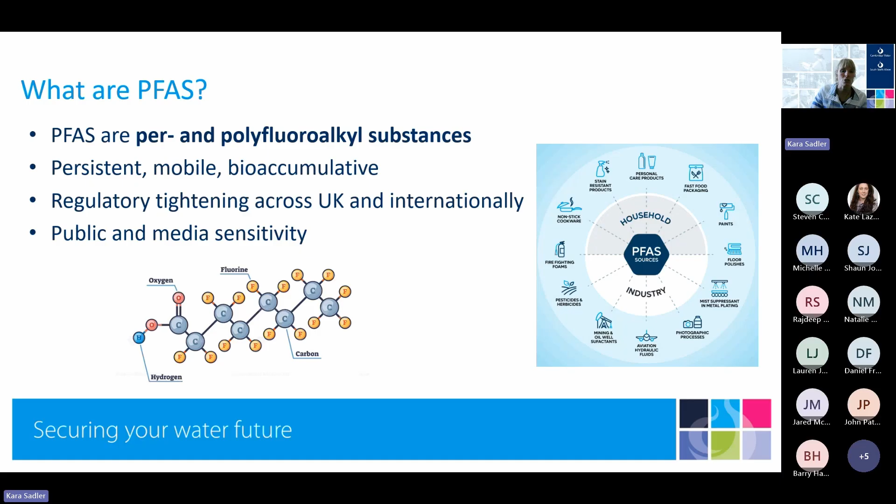Now, the Drinking Water Inspectorate, the DWI, has provided a lot of guidance in terms of PFAS, and in March last year they gave a consolidated guidance document detailing their requirements for PFAS monitoring, how we need to risk assess that, and what our strategy is in relation to our public water supply systems. The World Health Organization has also produced guidance documents—there's a lot of information out there.

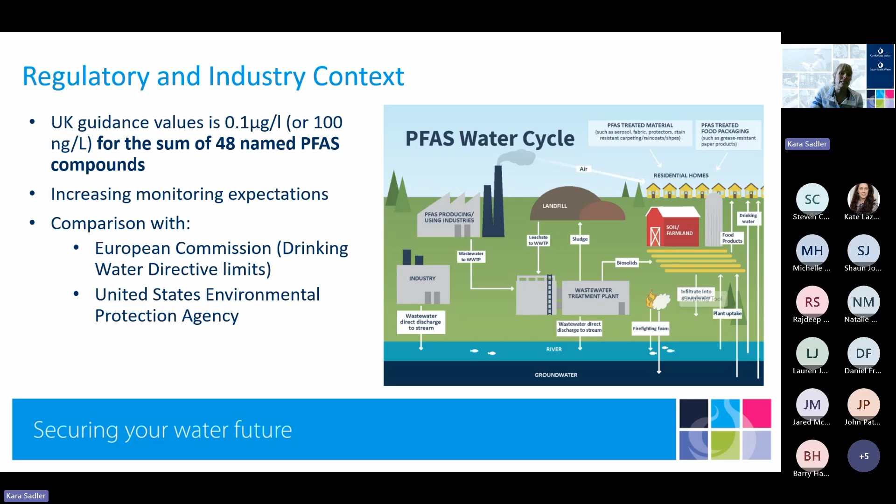Essentially, there's still no limit that's been set, but water companies have a duty to ensure that water is wholesome. So although there is no statutory standard for PFAS in drinking water within England and Wales, nor is there a World Health Organization guideline value, the DWI has taken a precautionary approach and produced tiered guideline values for water companies to adhere to—that is 0.1 micrograms per litre, or 100 nanograms per litre, for the sum of 48 named PFAS compounds. There are lots of PFAS compounds out there, but in particular it's those 48 that our regulator is interested in understanding where we have that within the drinking water.

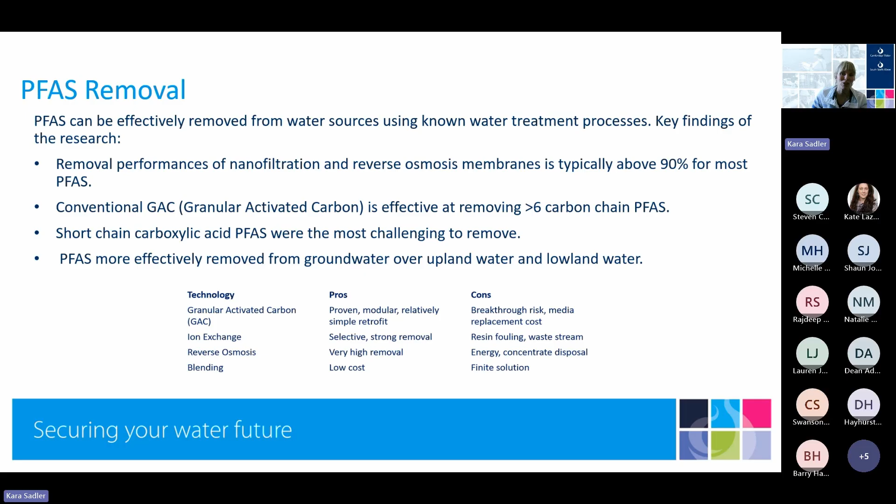However, it does depend on what you're trying to remove and to what level. There is some really good technology out there, and possibly in terms of best available technology—where does that apply? GAC usually has, up to this point, sat at the top because it's known, it's a simple retrofit, and it's a proven technology. However, there are some drawbacks to using GAC, which I will share in the next few slides.

So to give some context into the background of the case study: we have a water treatment works within Cambridgeshire. It treats water from groundwater at Duxford, which is an active airfield and museum in Cambridgeshire. So the key part being their active airfield.

From the few slides ago, you'll see that one of the causes of PFAS can be from where we've had detection of PFAS in firefighting foams previously. Although we've worked with the Duxford airfield to remove those fluorine compounds within their firefighting foams, there is still that accumulation within the ground that means we have to treat it, and it doesn't go away.

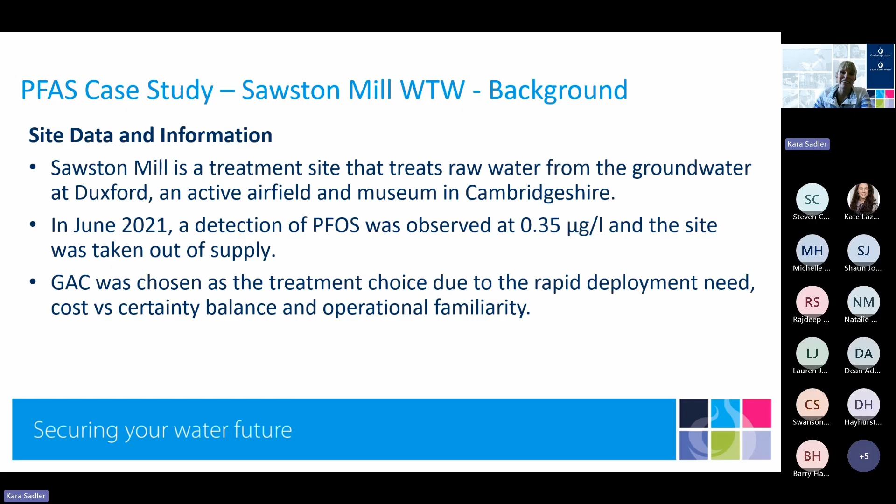Back in June 2021, we detected PFOS at 0.35 micrograms per litre, which was above the tier 1 level that we need to see in drinking water, and the site was taken out of supply. So GAC was chosen because of the rapid deployment, the cost versus certainty balance, and the operational familiarity, which is a really big part of that.

In terms of the site, it was designed to treat on an empty bed contact time of 15 minutes, an average flow rate of 176 metre cube per hour, with 3 GAC vessels. The idea was that we would get about 30,000 bed volumes at that flow, which would give us about 12 months of running before we had to fully replace those GACs.

To note here, the groundwater quality at Sawston Mill from Duxford is very good, so we didn't have to include a backwash facility, because of the challenges of backwashing that water. We were unable to discharge and run to waste in the environment, because you've got PFAS in your backwash water, it's going to be going straight back into there.

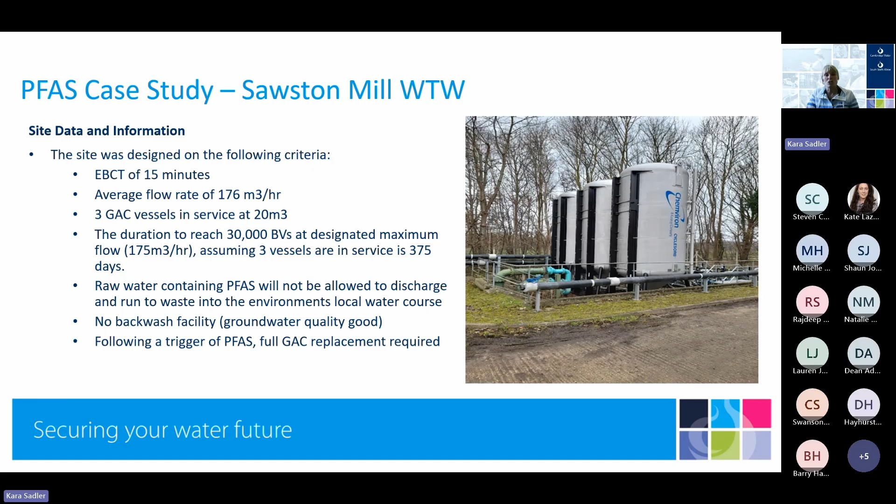Following a trigger of PFAS, full GAC replacement would be required. In terms of our response criteria that we set ourselves internally, we had 3 levels that we would go through before we shut the site down, carried out further investigations, and then actually carried out GAC replacement. Now these are quite tight and stringent levels - if you look at the original level that the DWI have, it's at 0.1 micrograms per litre, so ours is a quarter of that guidance level.

The reason being is the turnaround time of the lab samples - generally speaking it could be 2 to 4 weeks before we got those results back. We did put Sawston Mill on a quick turnaround time, but we don't have the 24 hours to respond, and we cannot have water that, if it was above that level, going into supply for more than 2 weeks. So we had to set ourselves some very conservative levels.

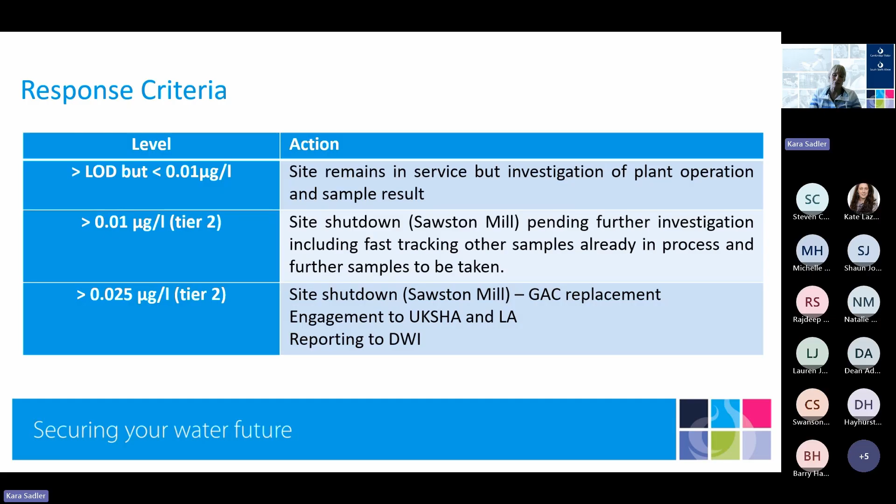But the performance was not as expected. One of the key things that we did as part of Sawston Mill was have a pilot plant, and that pilot plant was to operate to enable us to see breakthrough from PFAS compounds before we had it on the final water or from the GAC vessels themselves.

The site went into supply just at the end of April, and we had detections within July. We didn't have any on the final water, but we did get those detections a lot earlier than we expected.

We had to replace the GAC media, and one of the other things we encountered that we didn't account for within our design parameters was that one of the key PFAS compounds, PFBA, was higher on the post-GAC level than the raw water. So there was a suggestion that there may be some desorption of that, because the GAC had a greater affinity for other PFAS compounds.

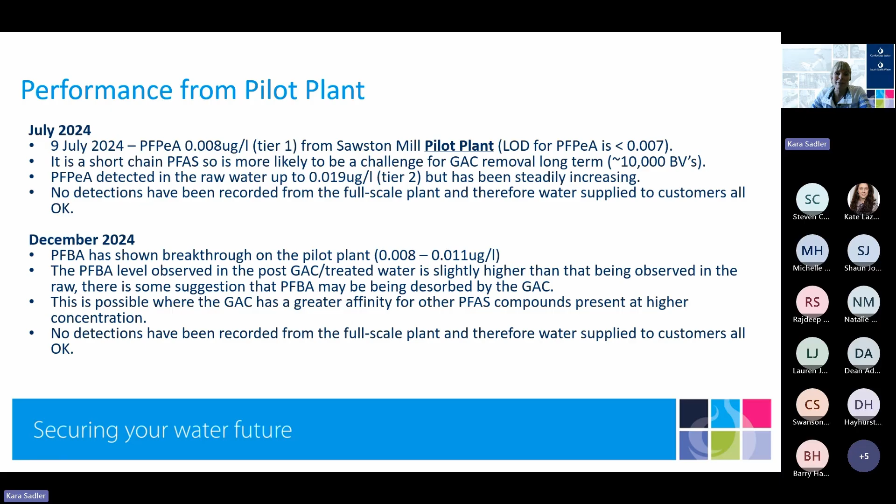Those two types of PFAS compounds I'm talking about are the short chain molecules that are a lot harder to remove by GAC. So GAC is a great technology for removing those longer chain molecules, but when it comes to the shorter chain, there is a real challenge for removal using GAC.

So our expected use of the GAC plant, we were expecting at least 12 months, and we found that we were getting around 3 months. This is because, as I mentioned, the short chain compounds PFPeA, PFBA and PFHxA showed the signs of breakthrough. Going back to what I said earlier in terms of the efficacy of the treatment process, it really is dependent on what you've got in your raw water, because having those present created a challenge we were not expecting to have as a shorter version.

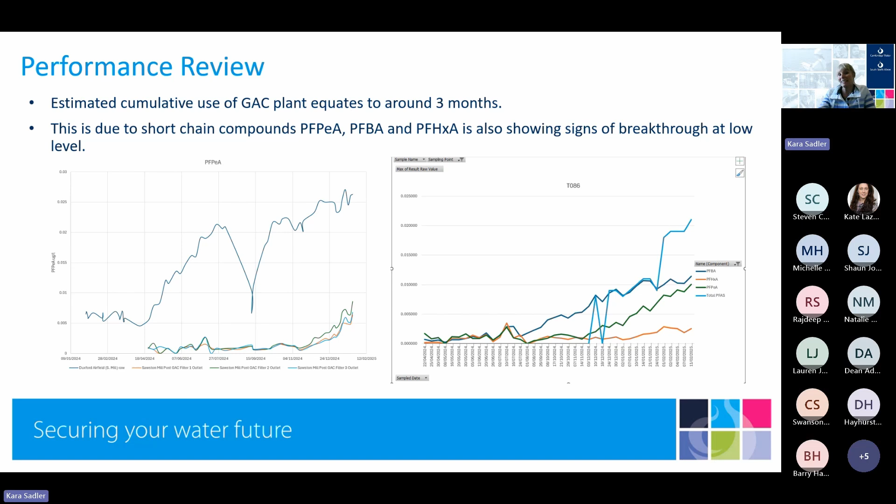And just to say about the operational costs, we're talking about £150,000 every time we need to replace those GAC vessels. So it is a big operational cost that wasn't accounted for, when we think that we could go 12 months from that.

So where are we now with Sawston Mill? Final water breakthrough occurs on our short chain compounds. When the total PFAS exceeds our internal limit, the site is removed from supply and we have to replace the GAC, which is happening roughly every 3 months.

The GAC pilot plant is absolutely key for predicting breakthrough. As I said earlier, the sampling frequency and lab turnarounds limit how conservative you need to be on the trigger levels, because if it was a 24-hour turnaround time, we would be able to be a lot more lenient, but we cannot risk having water that's going above those guidance values to our customers.

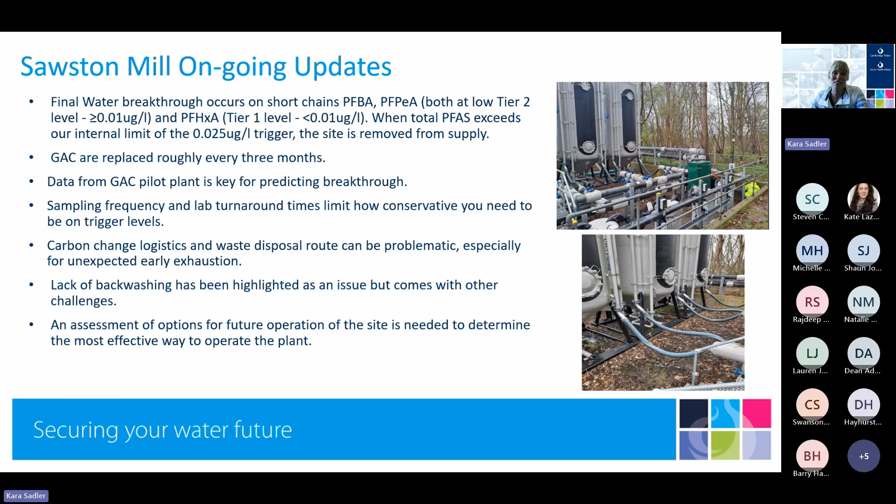Carbon change logistics and the disposal route can be problematic, especially when we've got early exhaustion, and the lack of backwashing has been highlighted as an issue, but it comes with other challenges by retrofitting that into the process. So we are continuing to look at an assessment of options for the future operation of the site to determine the most effective way to operate the plant.

So is it a long-term solution? And is there another technology that is becoming preferable? Well, in terms of the 3 months compared to our 12 months, the media replacement frequency from a cost and carbon point of view is problematic, especially with disposal costs, embedded carbon, the extra haulage, etc. For ESG, it is not great practice for us, especially when we're looking at net zero strategy and resilience planning. The whole life cost really does need to be taken into account versus capital cost.

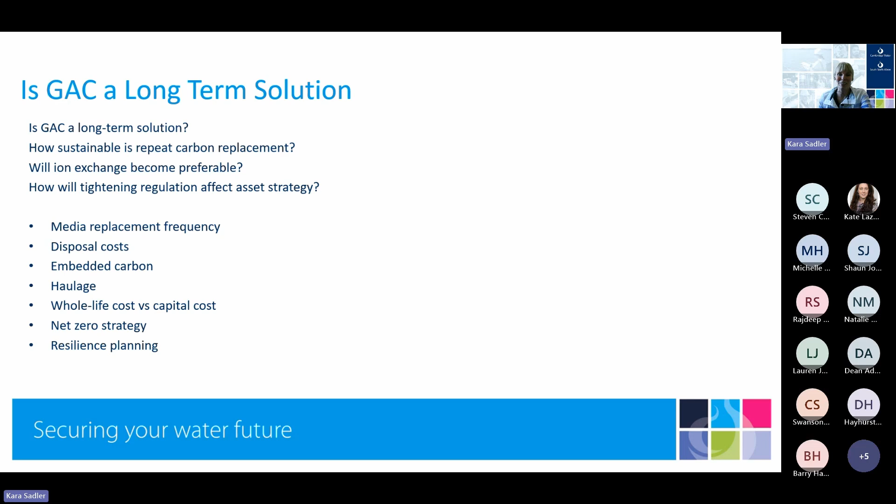We don't have the answer yet. We are still ongoing with this, and we are looking at other technologies on what we can do, which I think will feed nicely into hearing from David and Cathy now in our next presentation.

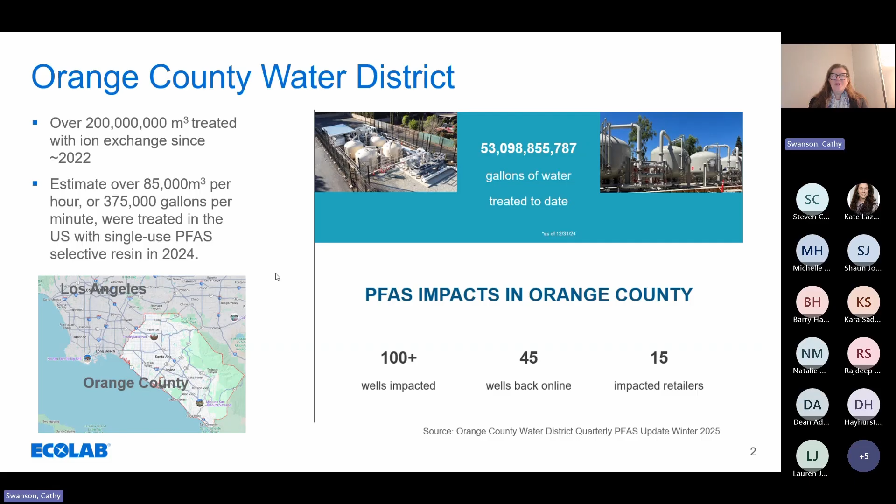And I thought, wow, that's really cool, because I think 80% of all sites treating PFAS in California are treating with ion exchange. And so I sat down and tried to estimate how much of our water in the US is treated with ion exchange when looking at PFAS. And I estimated over 85,000 cubic meters per hour are treated with single-use resin in 2024. And that's probably grown in 2025, and I should probably update the slide, but it's still a pretty big number.

And why is that? Why has the US embraced single-use ion exchange technology? Now, I want to clarify, when I say single-use, it means that you use it and dispose of it, so there is no waste stream with a single use. A couple of reasons: fast kinetics means smaller footprint, which means lower capital cost. High selectivity means longer bed life, which means lower operating cost. And because you're using less media for longer periods of time, you have less waste generation, which leads to better sustainability and lower operating cost.

So what I hope David and I are going to show you today is a little bit of data to substantiate everything I've got on this slide.

So in the UK, how prevalent is ion exchange? Well, it's actually used extensively in the municipal space, specifically for nitrate removal, and also there's an installed plant removing chromate at a municipal scale. Outside of municipal water, it's a standard technology used in all nuclear applications. It's in all breweries, it's in pharmaceutical applications. Anywhere where you've got a process stream that needs treatment, with an ionic constituent that you want to remove, then ion exchange will be present.

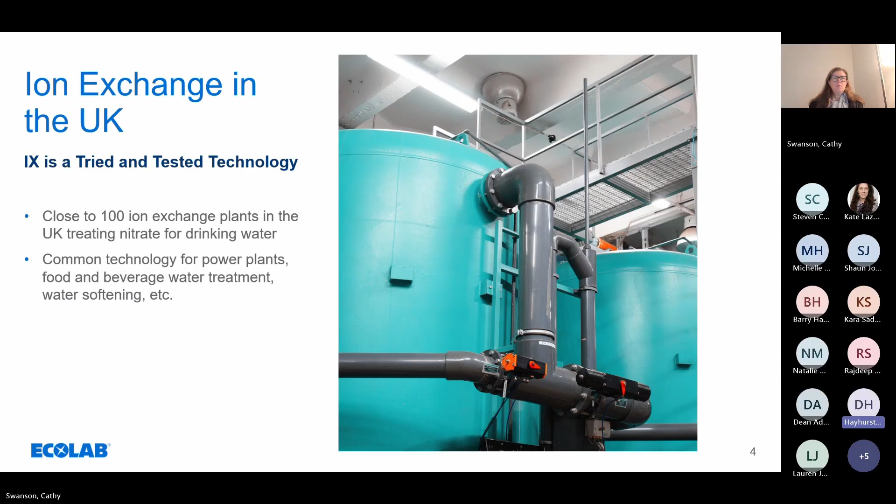Today we're going to talk about PFAS applications. We'll cover what PFAS is in some reasonably high level detail, go into the regulatory stuff in the US, Europe and the UK, do some ion exchange, not too heavy on the chemistry, then get into system design, and finish with a case study of a plant design and install in the US.

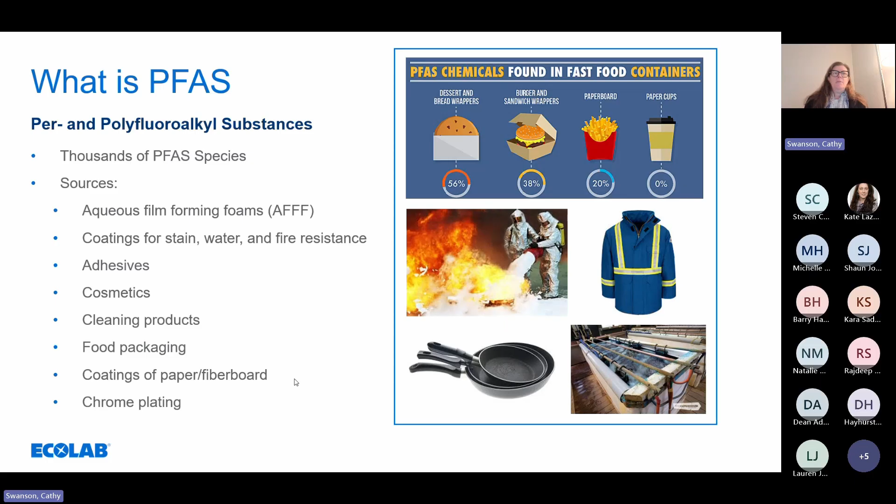This was covered already, so I don't want to go too deep into it. Just know that there are thousands of species and many sources. We're not looking at treating all of them at this point, but why do we care? It's because PFAS is bioaccumulative, environmentally persistent, and linked to a variety of healthcare concerns.

Barry did a very nice job covering that in the beginning, so we're going to skip over it. In the United States, this is a map from the Environmental Working Group that looks at where PFAS detections have been found. There are some states treating this more aggressively than others, and we do have different regulations at the state level.

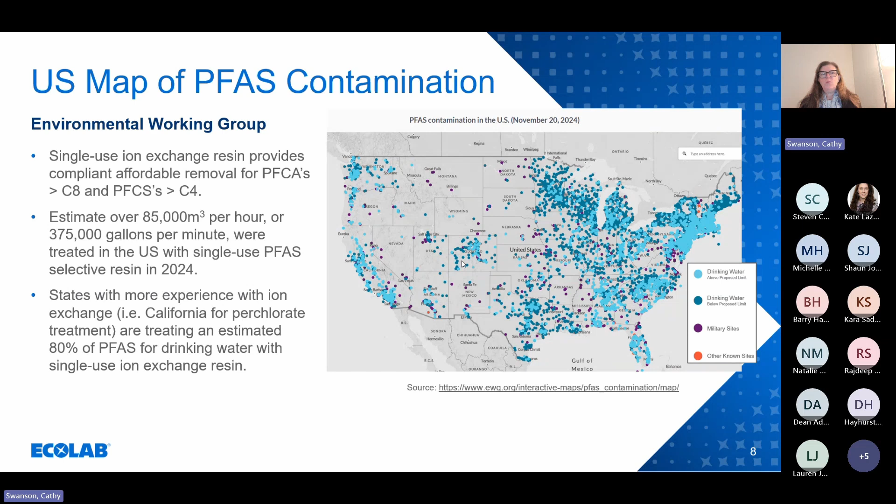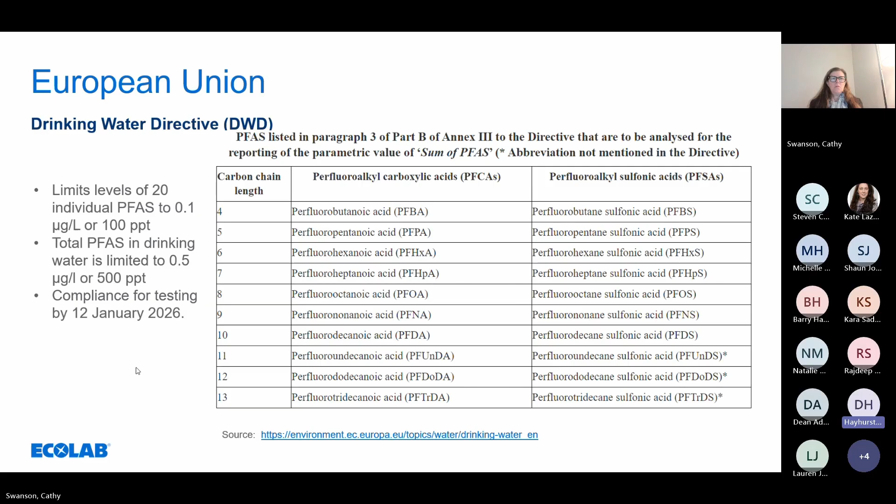In terms of these, you can actually group these molecules into two different types, as illustrated here. Depending on the functionality of the molecule and the chain length, this affects how the molecule will load onto your media, as Kara alluded to earlier. Anything with a sulfonic acid group will load nicely onto an ion exchange resin and stay fairly firmly bound. Anything with a long chain, above C8, octanoic acid, PFOA, will load quite strongly. Anything with a carboxyl group and a shorter chain, so the butyl, pentyl, hexyl and heptyl species, are more challenging.

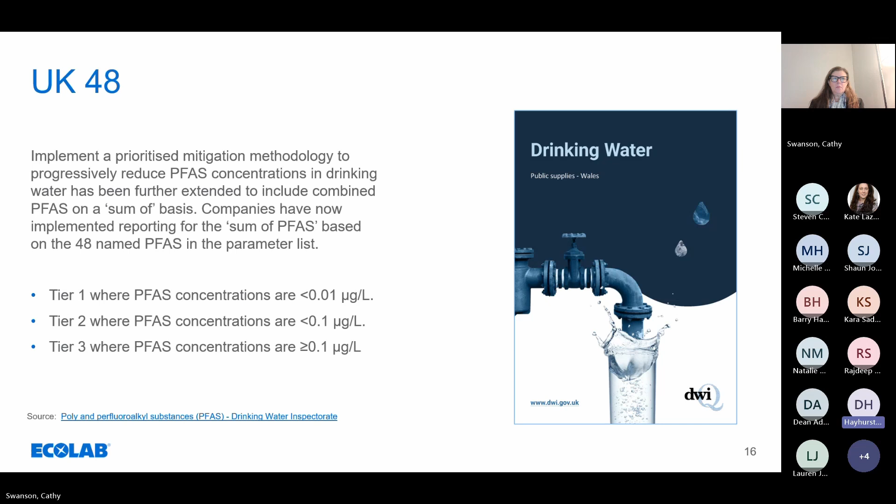I think we've probably talked about this already. The way the system works in the UK is 10 ppt is considered tier 1. If you're working between 10 ppt and 100 ppt, that's tier 2, and that's a monitor. If you're above 100 ppt, you've got to do something about it, and bring it back to tier 1. So if you're above 100 ppt, you should be expected to be targeting 10 ppt and below in your treated stream. This is managed through the usual DWI regulation of Regulation 31, for those unfamiliar with it.

And this is the controlling regulation for all materials going into municipal water supply, and that includes things like ion exchange resins.

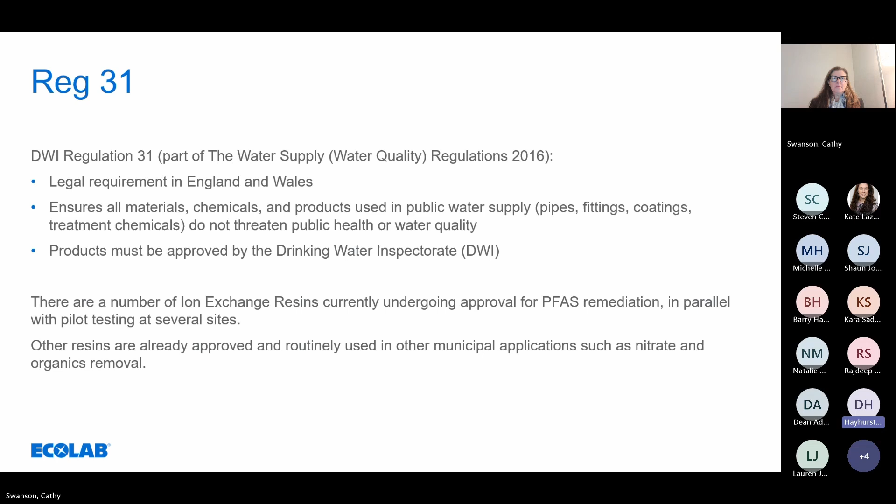So let's go over some single-use ion exchange basics. The reason I'm starting with single-use is if we go back to that chart that David was talking about, what you see is the majority of the compounds we're looking at are suitably removed with single-use resin. And those are the same compounds that these single-use resins are targeting in the United States.

I want to go over a little bit of how they work, and it'll help you understand the background. So as mentioned, these are carbon chains protected by fluorides. Fluorides are kind of like force fields, right, that protect that bond and keep that molecule healthy in the face of sun, heat, oil, things like that. It's the sulfonic head, the ionic head, that allows the molecule to be water soluble. Until they figured out to put the ionic head on it, they couldn't even use the fluorocarbons. And so that's what this does.

So we take advantage of this ionic head, and we capture PFAS through ion exchange. That ion exchange is a very fast and very strong reaction, and those fast kinetics allow us to treat very quickly. So the typical contact time for GAC is about 10 minutes. The typical contact time for ion exchange is 2 minutes. So you can treat 5 times more flow through the same footprint.

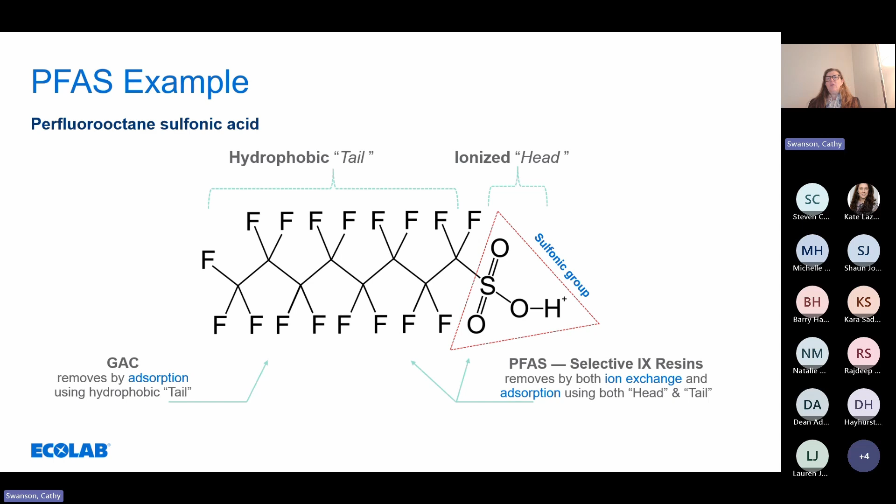So there's a couple ways we look at regenerable resin. One is a solvent regen. Now, a solvent regen would swell the bead. You use a solvent and a brine. Now, that has been done on military installations and with industrial sites, but obviously using a solvent is not appropriate for a drinking water application. So that is really not done at this time.

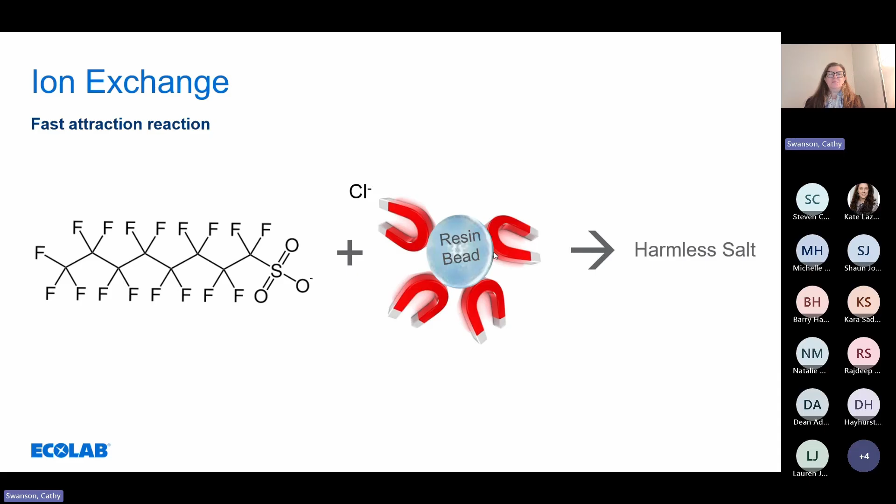So from a single use, I mentioned the very fast kinetics. So essentially, here's your ion exchange bead. I like to visualize it as this magnet, but of course it's an ionic thing. So you're literally exchanging a chloride for your PFAS here. And how does it know to exchange the chloride for the PFAS? It has to do with selectivity. So nitrate, sulfate, chloride, alkalinity are all in the water, but it is more selective for anything as you go up the graph here.

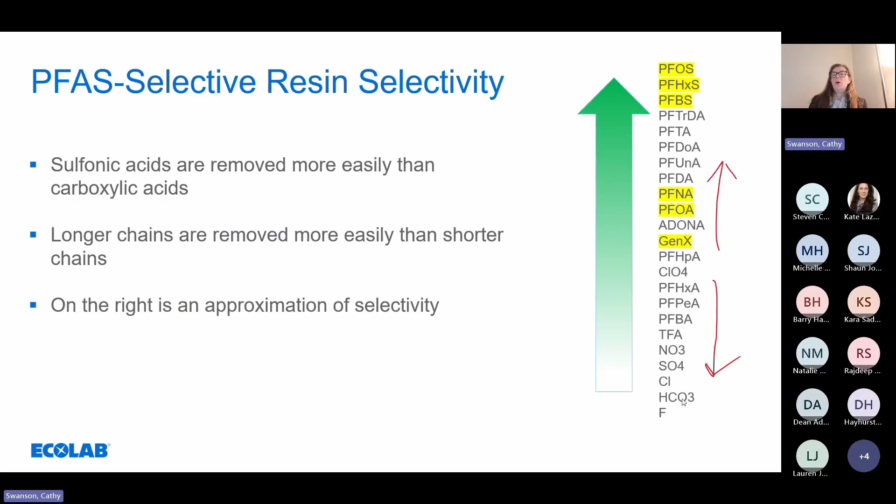Remember though, that these ions are in the water a million times higher, ppm versus part per trillion. So while it's more selective for PFAS, there's also the concept of competition, and it's the background ions that really drive the throughput for ion exchange resin.

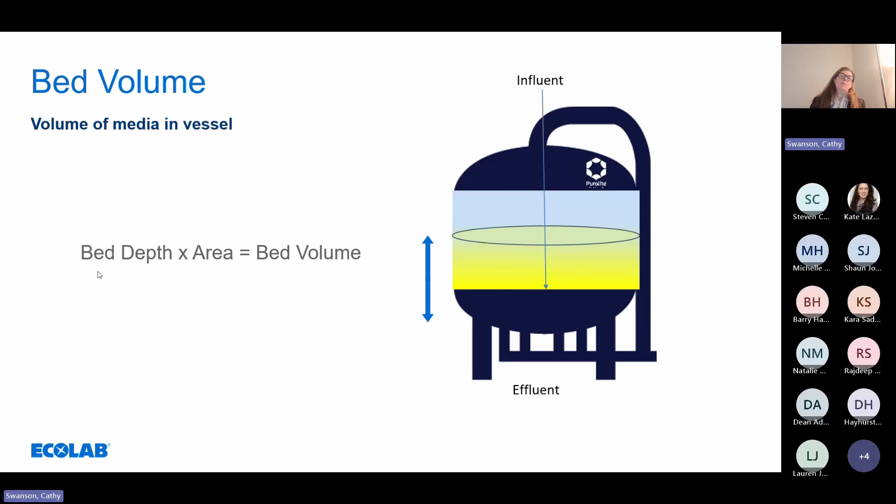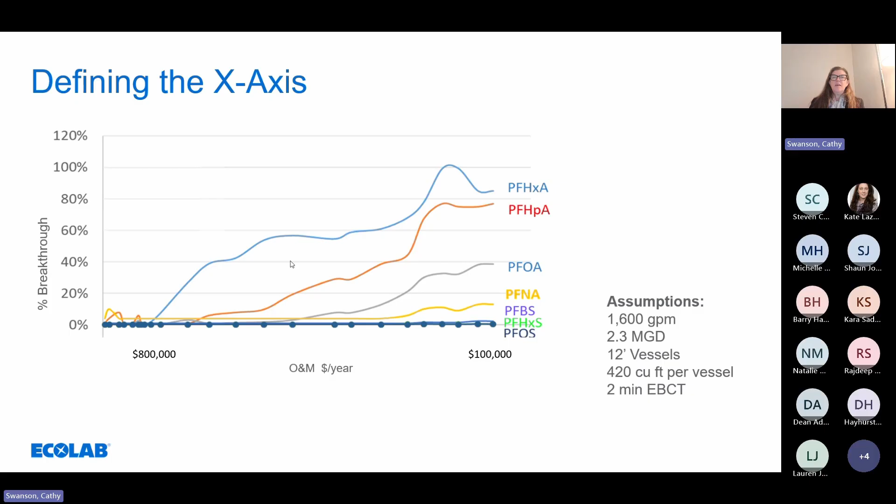Outside of the US, as we mentioned, the focus has been quite significantly on short chain as well as the long chain molecules. So work is ongoing to look at tackling these short chain molecules and how we can manage those. And the route we see mainly pursuing here is looking at regenerable solutions.

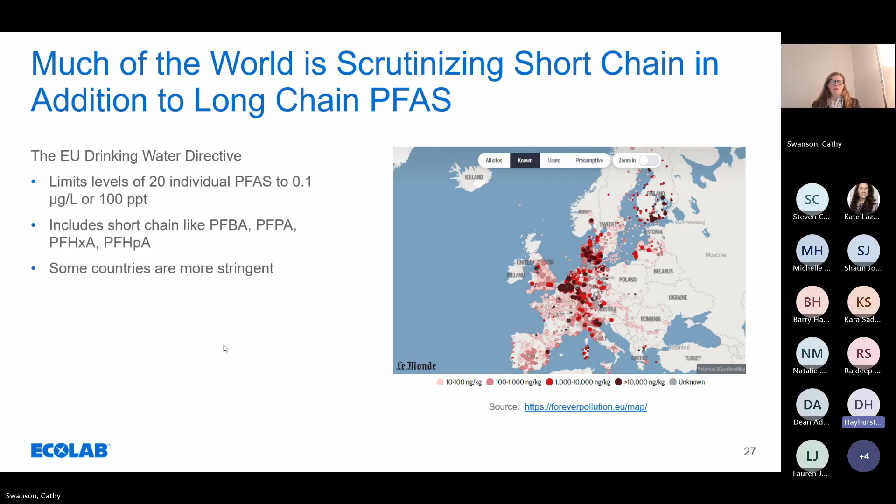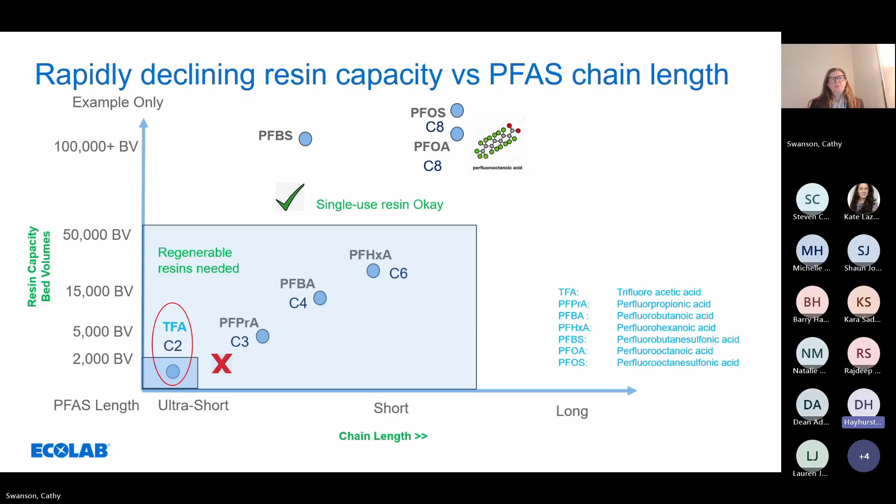So this lends itself to a regenerable solution. In single-use systems, we can use a solvent system, but they're not really suitable for municipal supply. In the case of regenerable systems, we can switch over to a different type of resin which is regenerable. Let's go into some details on that.

The selective weak-based resins, we can run slightly acidically, and by using a bit of caustic, you can then regenerate the short chain molecules from the bed, and then you have a PFAS-laden waste stream which you can then run through a destruct technology.

So where we see this practically speaking is that the longest term solution for dealing with PFAS will probably be a combined approach: single-use media to deal with the long chains, and a regenerable media to deal with the short chains.

We've actually looked at this specifically at modelling at the Sawston facility, where based on the data we've got so far, we probably bring down that change-out point. We've increased from 3 months to probably about 8 months using a single-use combined with regenerable system, and reduce the volume of resin or disposal material down from 20 cubes down to about 6 cubes every 8 months.

So we can see that immediately by using this combined approach, and tackling the short chain molecules via a regenerable system, that gives us a significant improvement in terms of waste stream.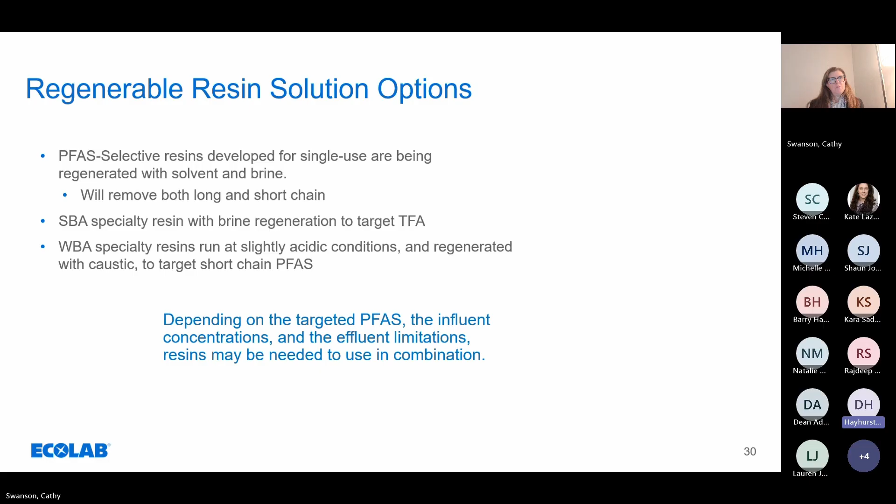So when we talk about waste management, that's usually one of the questions I get. Right now with ion exchange resin, you can landfill or incinerate. With GAC, you can incinerate or reactivate. So those are currently commercial.

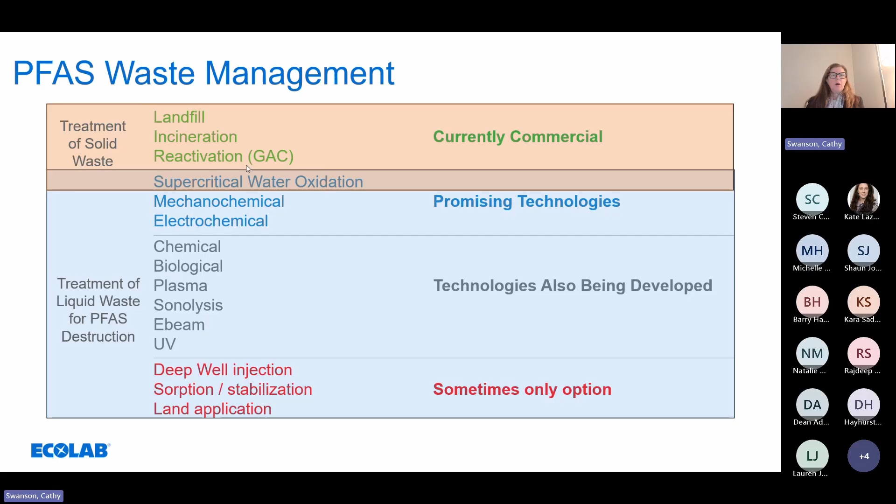Supercritical water oxidation is also a promising technology, and those are basically the treatments for solid waste. Most of these other treatments are good for liquid destruction, and that's also where regenerable resin is ideal, because for the most part these need to be looking at a liquid stream for destruction.

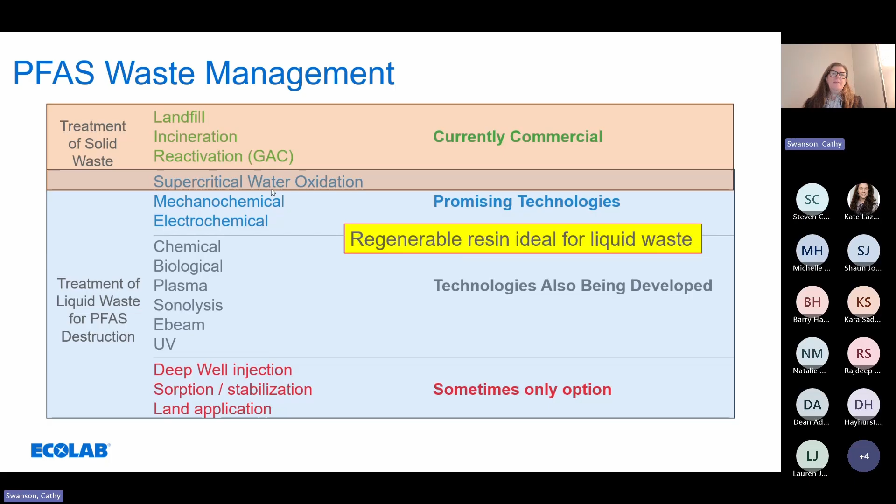So let's get into system design a little bit. The first thing that we're going to start with is water quality.

David will email you a chart that looks similar to this in Excel. It's extremely important to know the background ions in order to accurately predict how long the PFAS is going to last. Other things that are extremely important are things that can foul the resin: iron and manganese, suspended solids, oil and grease. We need to know those up front to know if any pre-treatment is needed.

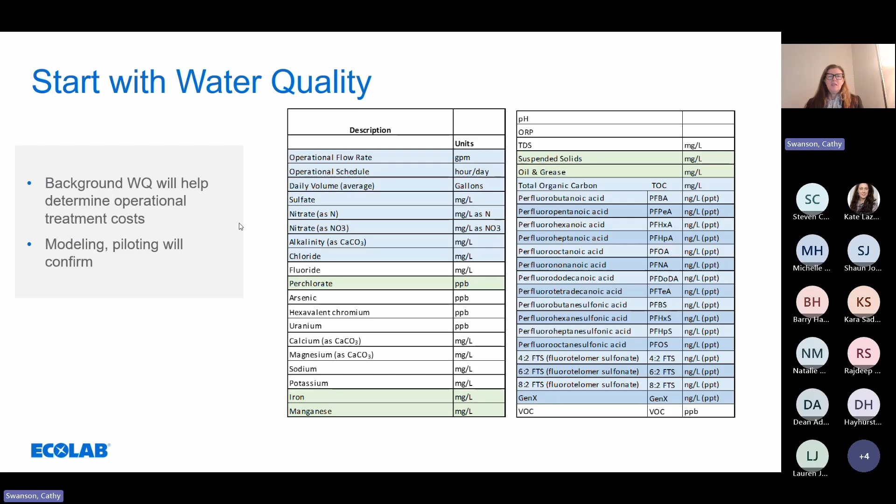In the United States, I am one of the co-chairs of the American Water Works Association committee for ion exchange, and the subcommittee that is writing a standard for ion exchange resin. This standard is called B104-24, and we were writing one guide for all types of resin, single use and regenerable.

But when the MCL came out for PFAS, we pivoted and said, look, we really need to get the single-use guide out as soon as possible. So this is available, you can find it on AWWA's website.

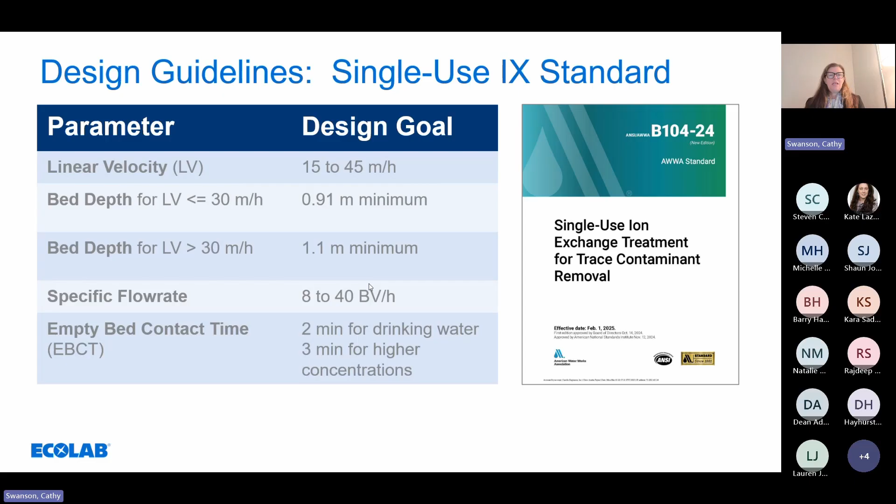But because I wrote that, I've also written some internal guides, and these are essentially the parameters for design that you're looking for. We've got a whole guide - you can go to our website, scan this code, and these are guides for drinking water and one for environmental discharge.

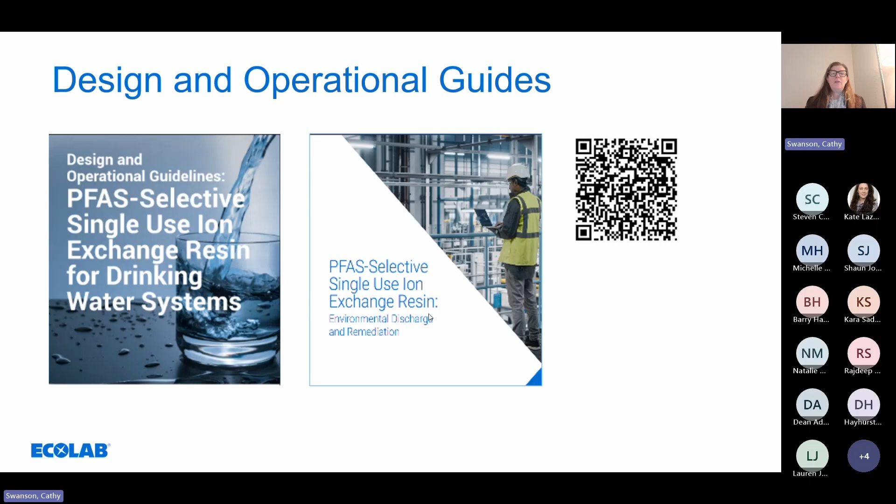So what we really want to do is present this case history from Los Angeles, just a few miles from my house. This was Pico Water. And what we did, we started with a water chemistry.

A couple things you'll notice, they do have fairly high sulfates, 120 ppm, which is one of the competitors for throughput, but still very, very good throughput here.

So this is our model, a total of 54 part per trillion of total PFAS, of all of these compounds. PFOA is the regulated compound that drives throughput, even though PFOS is much higher than the PFOA, which is 12 - the PFOA breaks through faster.

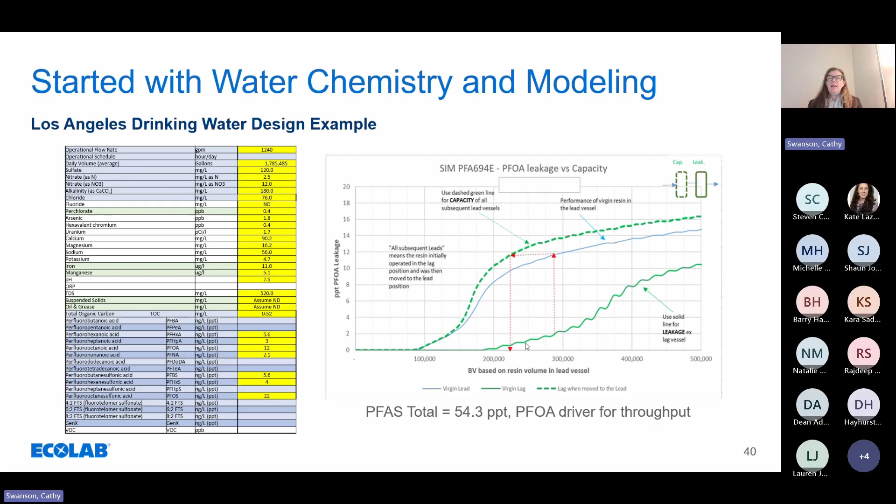So the other thing that is important to look at is where is your endpoint, right? And so here we're looking at what the lead bed is going to do, the virgin lead bed, the repeatable lead bed, and the lag bed. So all kinds of ways to look at it, and that's something that we can also model.

So we modeled it. They also did an RSSCT, a rapid small scale column test for GAC, and got about 27,000 bed volumes. Our modeling showed about 270,000 bed volumes. So we decided that we needed to validate it.

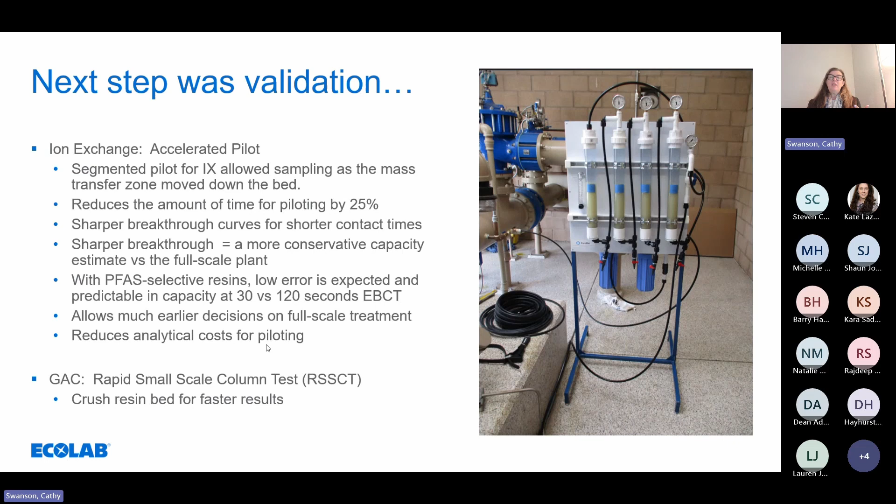which reduces the amount of time that we need to pilot. So this accelerated piloting, you can see you get breakthrough a little faster, but it is more conservative, right? So the 2-minute empty bed contact time is going to last a lot longer. The other thing is, and we've worked with the regulators on this, if we can accurately predict ion exchange under unideal conditions, then you can also trust our model under ideal conditions.

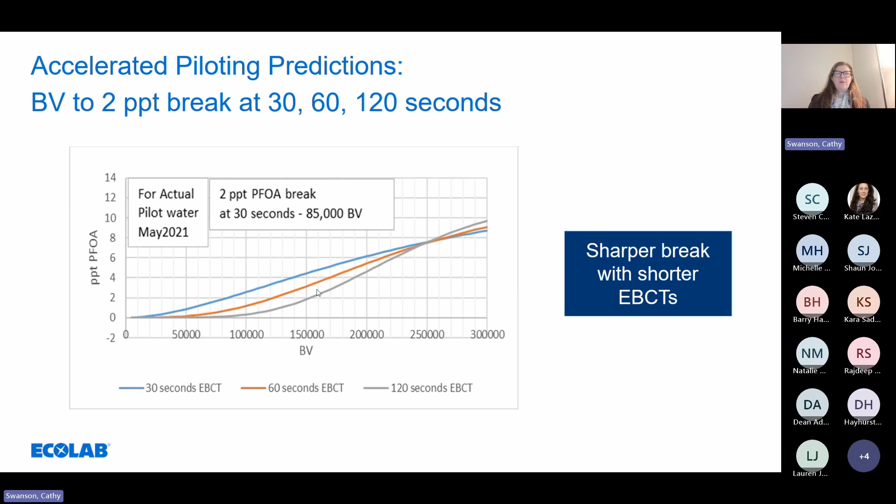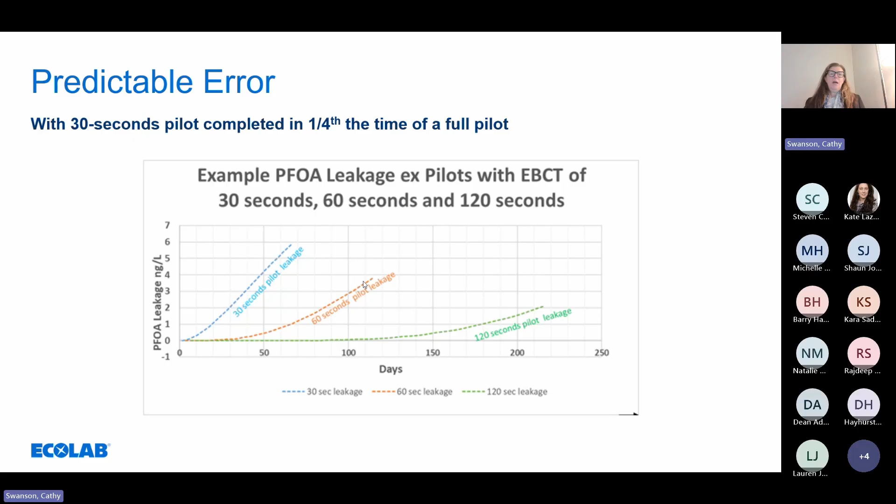And we've done quite a number of accelerated pilots throughout the United States. So this is the same graph, but instead of bed volumes, it's in days. And this makes the obvious point that you get results much faster, within weeks instead of months to years, piloting full bed depth. So here are the results.

So this was our model. Here's our actual, and so you can see our model was conservative yet accurate.

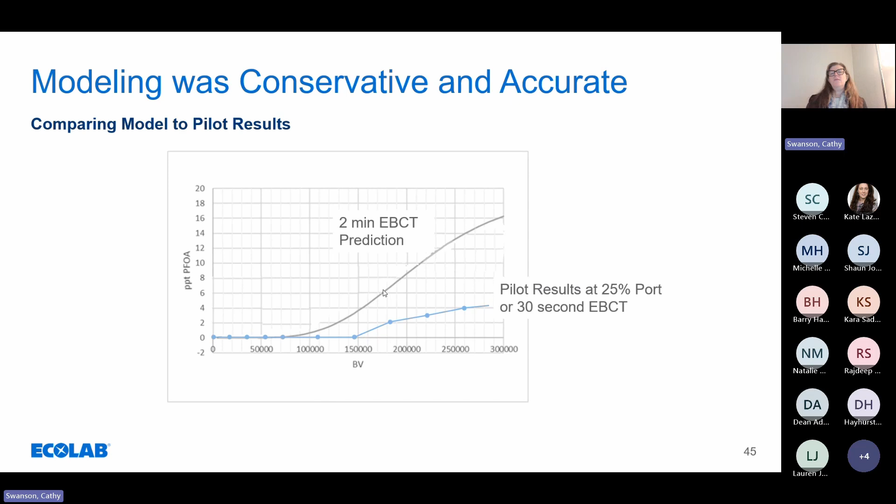And when we plug this into our design formulation, we get 4 vessels. So this was a 681 meter cube per hour site. So we're using 2, 3,500 millimeter vessels. We call those 12 footers.

On the ion exchange, on the carbon side, they were using what we call 40,000 pounders. And so these vessels are still 12-foot diameter, but they're much taller so that you can fit more carbon in there. And this is the site.

And a lot like a lot of sites in Europe and the UK, these are older sites. They don't have a lot of room. They didn't plan to treat PFAS when they drilled this well.

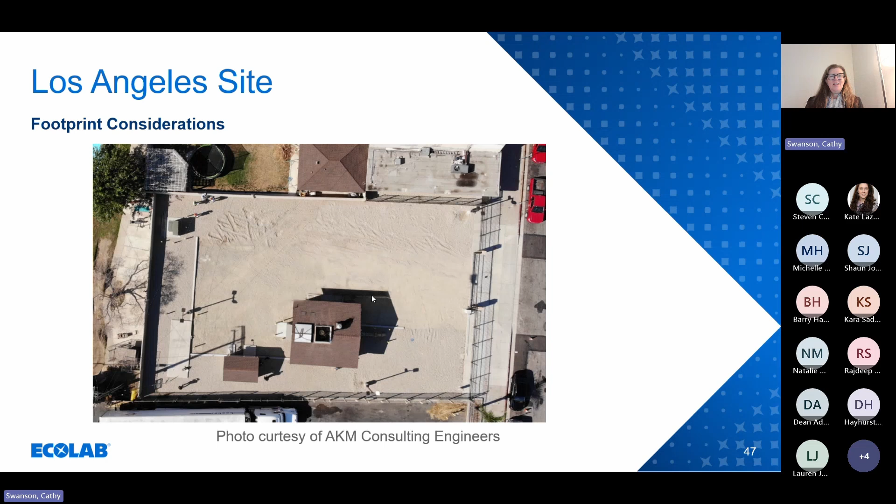This is the site and the constraints. We've got a liquor store on one side. So quite a lot of building and stuff around, not much room for expansion either.

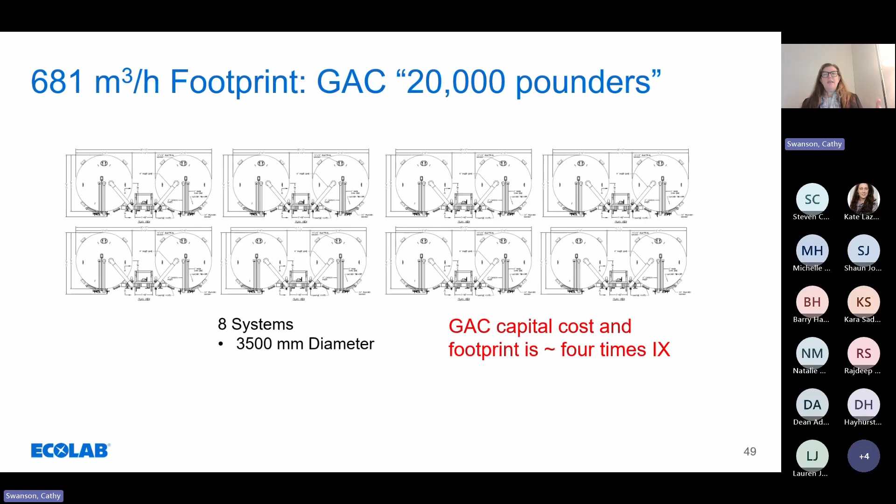So this is what the ion exchange system would look like. This is what using 20,000 pounders would look like. And for the 40,000 pounders, they would only need 4 vessels.

So much less equipment with ion exchange. The other thing you notice is that we've got 10 times the throughput with ion exchange. This is very typical. Typically, ion exchange is going to get anywhere from 5 to 20 times more throughput than GAC. And it's interesting because 5x is kind of that break-even point where the cost of ion exchange versus GAC and all the disposal and everything, that's your break-even point in terms of when ion exchange is going to be more economical. So we got 10 times the throughput here with ion exchange.

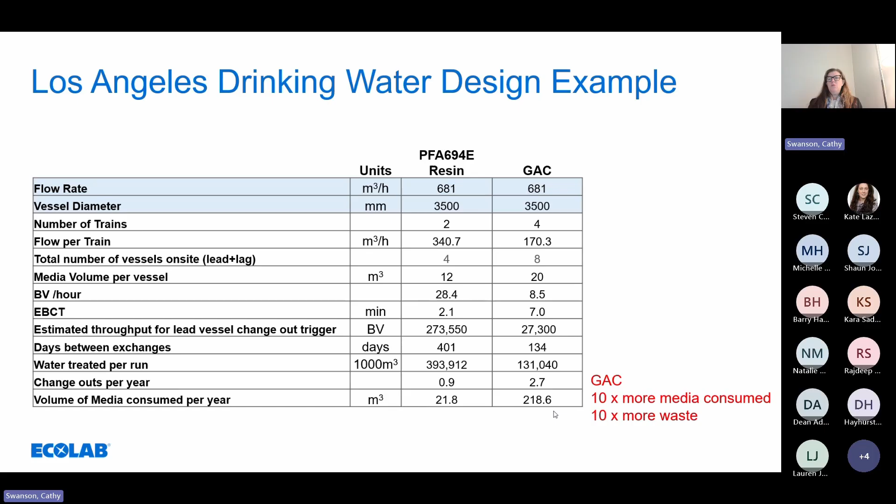The other thing to notice is in terms of media consumed per year, it's consuming 10 times more media, which means 10 times more waste that we have to deal with. I did not convert this one to metric, but at the end of the day, what you see is because you're using less media with ion exchange and it's lasting so much longer, the operating cost was half for ion exchange than it was for GAC.

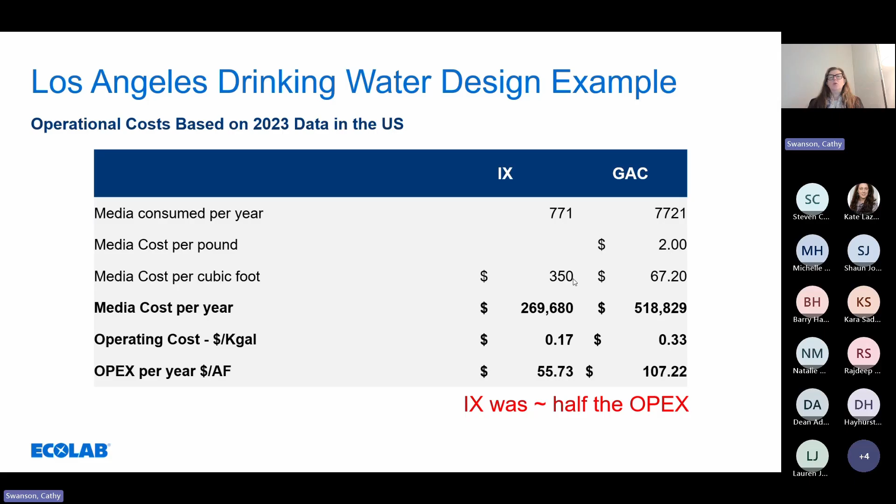Now, these numbers are based on 2023 data, and it includes media, installation, and disposal. So it is a turnkey cost baked into those numbers. And this is the happy ending of the story. So they did go with the ion exchange. It was filled only a few months ago, and it has been treating PFAS very successfully.

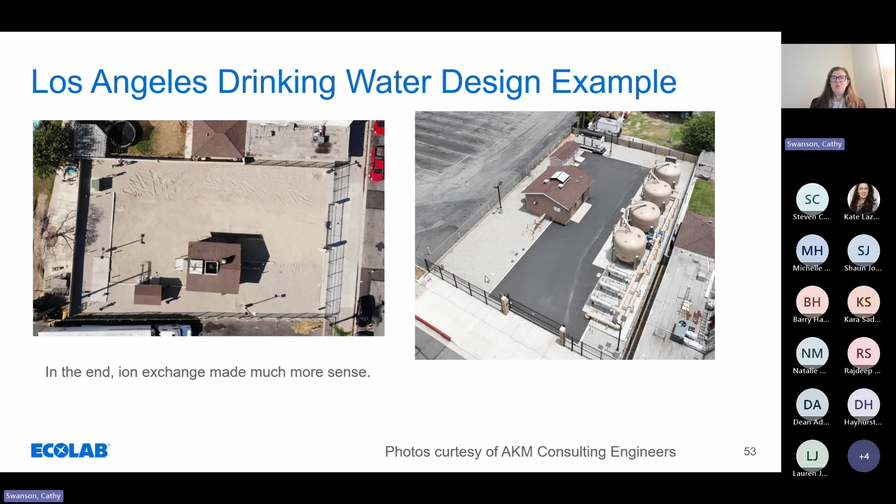So a couple of other brief things before we finish. In terms of sustainability, when you have a media that's lasting 5 to 20 times longer, you have that many less replacements and reactivations. So from a sustainability standpoint, you have a lot less trucks on the road.

The other thing is when you reactivate, it's going to a kiln that runs at very high temperatures and then goes to an afterburner. None of that energy is reclaimed. Ion exchange, for the most part, is going to an incineration facility. Those incineration facilities are waste to energy, and they are actually capturing the BTU that are inherent in that plastic. So it will destroy both the PFAS and the resin. The wet resin has about a 12,000 BTU per pound waste capacity in it.

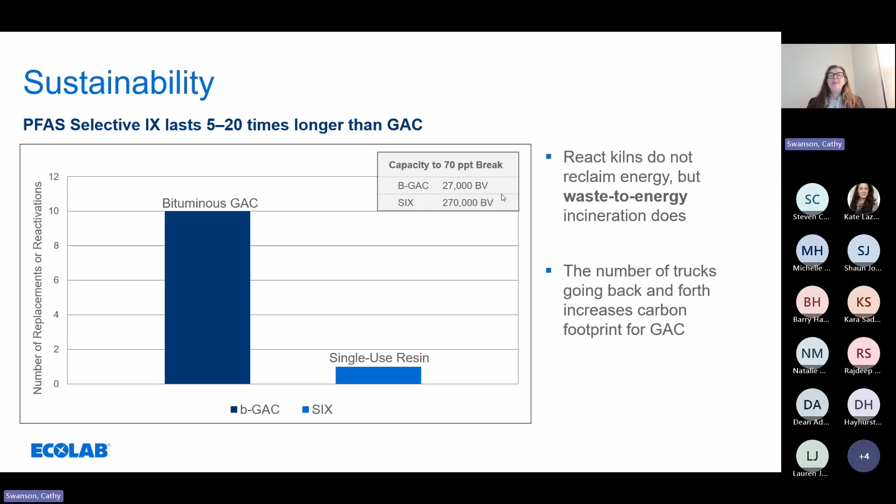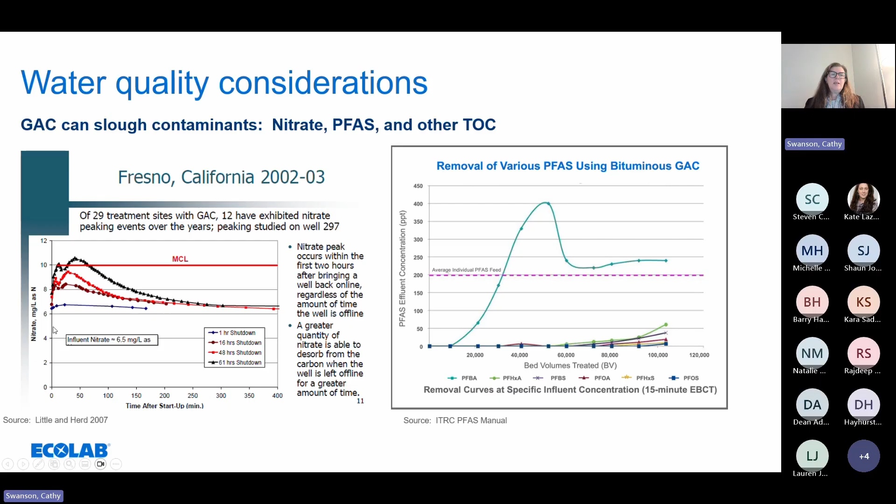Carbon can also do the same thing with nitrate. If you have a well that doesn't run 100% of the time, as it sits in the sun, the equilibrium constants will change, and when you turn the well back on, you will start to slough nitrate off of the carbon. That does not happen with ion exchange. One of the sites I worked on in Colorado went through this testing with ion exchange because they had experienced it with carbon, and it was very clear that ion exchange did not slough like this.

When we look at destruction, Calgon has done a study with the US EPA showing 3 and 4 log reduction of PFAS, and Clean Harbors has done a study with the EPA showing 6 log reduction of PFAS. So with incineration, people always ask me, does it actually destroy it? And the answer is yes, it does.

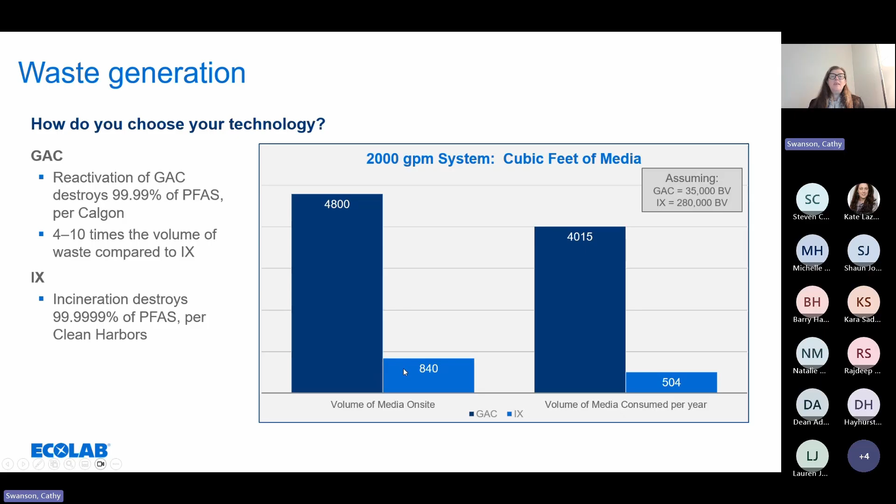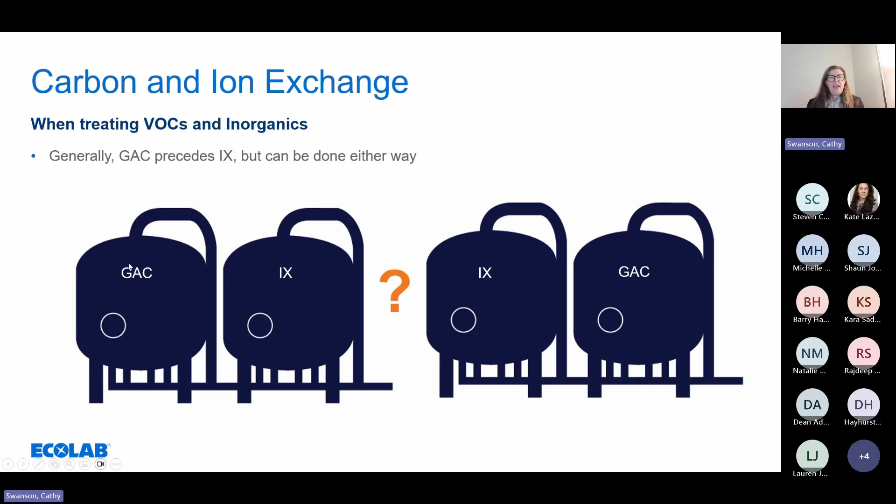So carbon and ion exchange can be used together. Generally, GAC precedes IX, but you can do it either way. If you do have GAC in the front and it's sloughing the PFBA, just know that your ion exchange will see that as well.

The other thing to note is that if you are treating anything else in that water with an anion resin, like nitrate, that nitrate resin has been loading PFAS for many years and has probably loaded it and broken through. We had a site in California, City of Rubidoux, where they put GAC treatment in front of a nitrate treatment system. When they put that GAC treatment in place, this resin was already loaded, and they started to get a slow elution curve with PFAS coming out. Even though it was zero coming in, PFAS was coming out because the equilibrium force had changed. So we ended up doing an emergency replacement of 1,500 cubic feet of ion exchange resin to get them into compliance as quickly as possible.

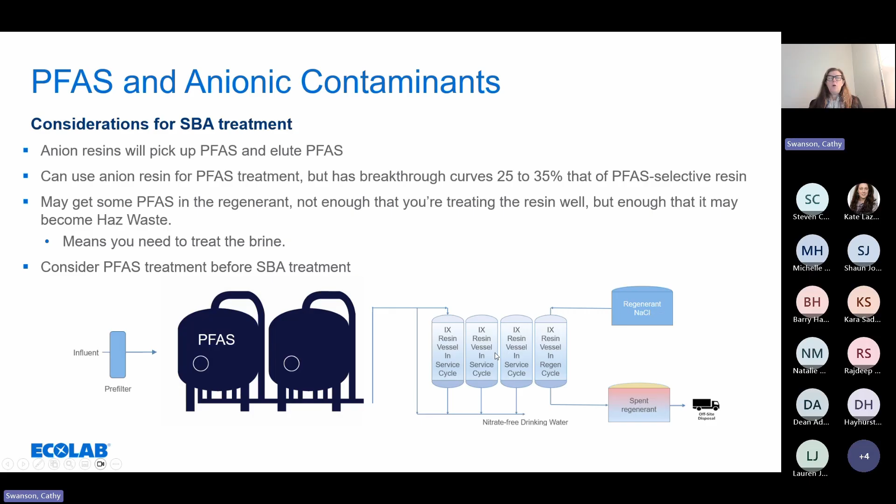So just something to keep in mind as you're designing these plants. I know there are a lot of nitrate plants throughout the US.

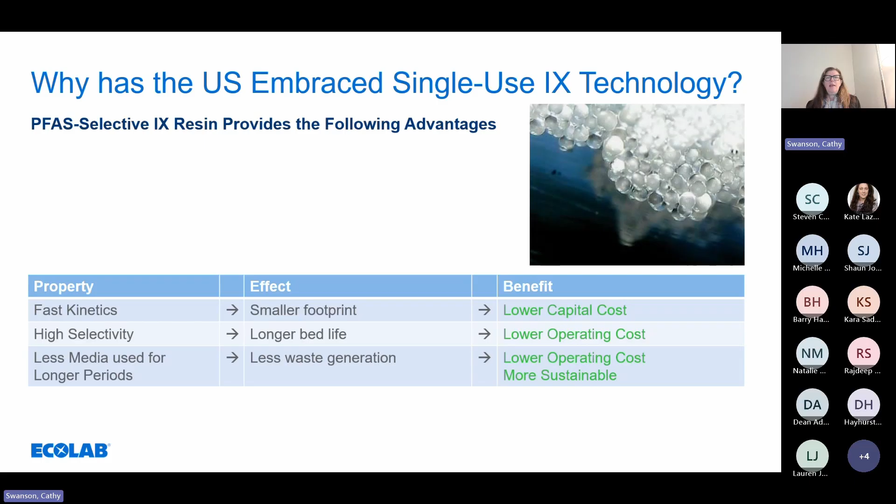Hopefully we've given a case study and some data that shows you that between the kinetics, the selectivity, and the less media and longer periods, that from a cost and efficiency perspective, it's extremely beneficial and sustainable. As we get into some of the shorter chains, we did not dive into the regeneration of short chains, but it's definitely an option and something that would be used in combination with either a single-use ion exchange or a GAC. And with that, I think we've got a couple minutes for questions.

Thank you, Cathy, David. That was really interesting. I did run a little bit over probably the time that we were going to put in, but it was extremely helpful. At this point, Dean, I wonder if you could share just a couple of words from the supply chain, and we'll come back to questions if we could.